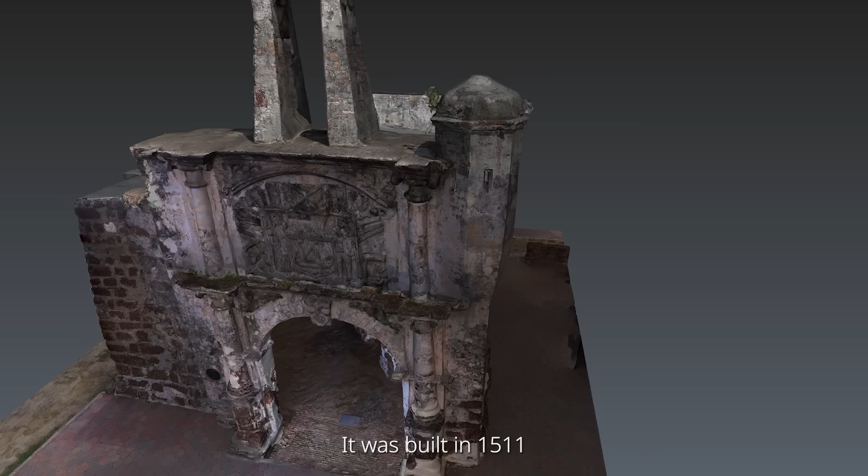A Famosa is one of the oldest surviving European architectural remains in Southeast Asia. A Famosa means 'the famous' in Portuguese. It was built in 1511, shortly after the capture of Malacca by the Portuguese. A Famosa originally had several gates, but the Porta de Santiago was the main entrance on the landward side, facing the town and inland areas, so it is also called the Land Gate. Because of the intervention by Sir Stamford Raffles in 1810, the Porta de Santiago survived complete demolition and still stands proudly today.

Today, we are very glad to be here, sitting in front of this fortification wall, called Famosa, built in the 16th century by the Portuguese when they first came to Malacca. Why are we here? It is quite a question, because as geospatial scientists, what can we contribute to these heritage buildings and antiquities?

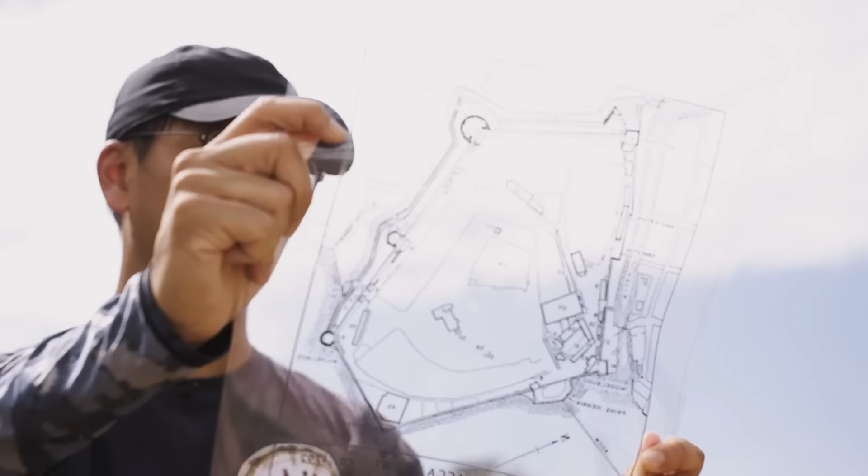Things would start from the maps. Obviously, it is quite a historical record.

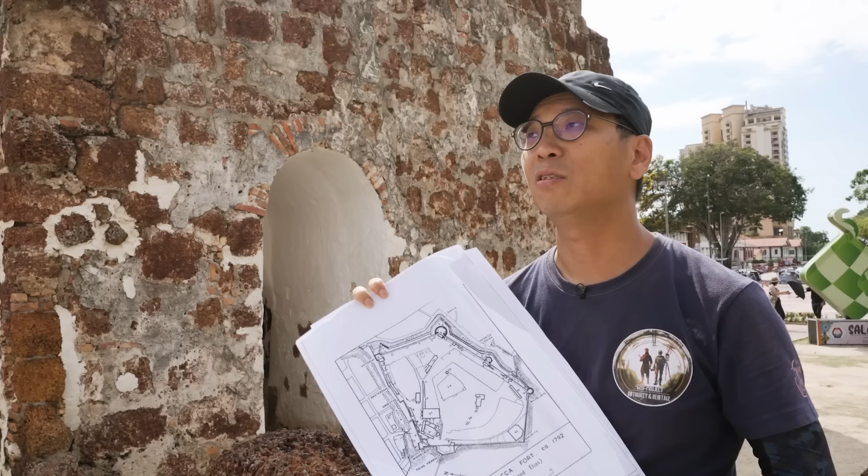Around us there are actually lots of tourists, but probably not many people would care about the real history of these areas — what they mean, what the alignment of the fortification walls is, how they connect to each other, and especially how they relate to the maps. If you think about it, it's like looking backwards to what happened 500, 300, 200 years ago, and now we are looking for very old heritage, or antiquities. The perspective of today's work is, of course, very different from what it was 200, 300, 500 years ago, but this is exactly what we can contribute.

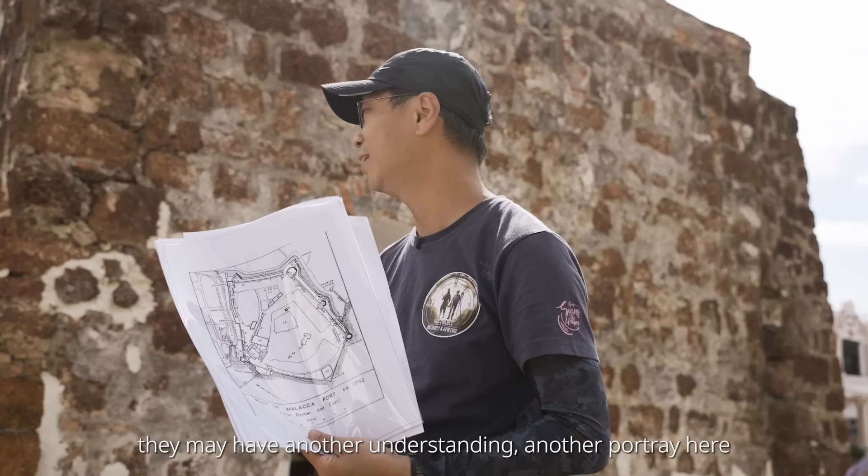If you look forward, after our work here, after our findings, maybe 200 or 300 years later, people with 22nd or 23rd century technologies may have another understanding, another portrait of this place. But today's work is going to be their basis, their foundation for future work, because technologies evolve.

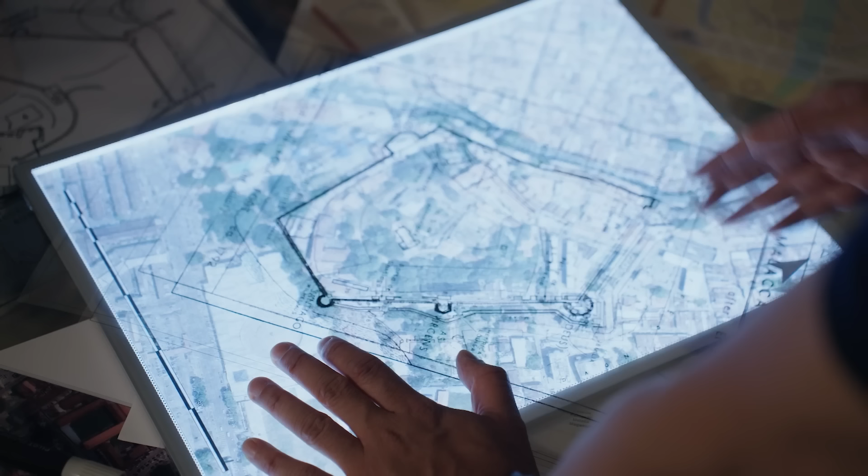Tonight we are here to study the history of Malacca, especially some uncertainties we have identified over the last year or so. In front of me is a map — actually a satellite image of the whole of Malacca — where we have the colonial fortification wall in the middle. So this is the map we have nowadays.

The Malacca city was initially occupied by the Portuguese in 1511. The first map was produced in 1588, outlining the fortification wall around the city for protection against other Western powers or Malay attacks. It's quite a rough map, but you can tell there are a few bastions that give us the outline of how it looked initially. Then we moved to 1660, a map basically produced by the Dutch when they invaded Malacca.

When we put it together at the same scale — at that time a rod scale — there's quite a lot of discrepancies. Before the British came, there's another map from 1792. That map is a lot more detailed, but the discrepancy is even greater. The line of the fortifications from, say, Santiago or the Famosa, basically seems not to align with each other. We tried to stretch the scales into a harmonized scale.

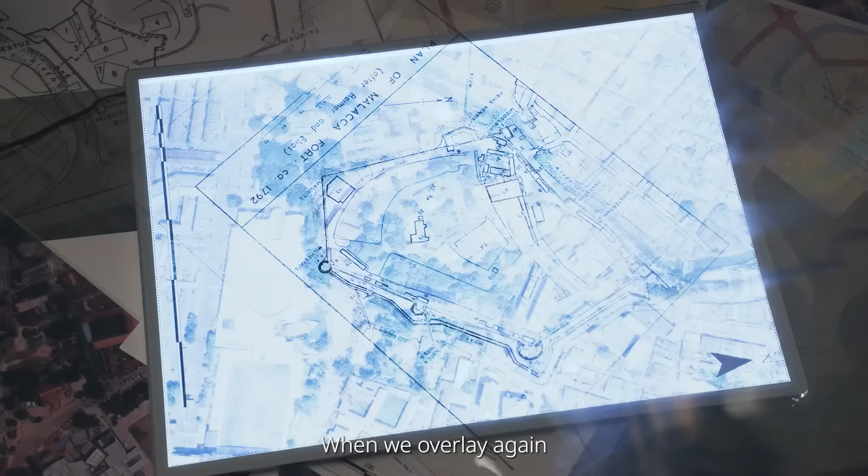When we overlay it again, things start to get interesting, because you can see the corners — the bastions seem to match a little, but bear in mind the scales are not right. The main features seem to be there, like St. Paul's, but the scale has been adjusted.

So why? Maybe a different datum? First of all, what is the meaning of the 'rods'? The English rod and the Dutch rod are very different — it's said to be 16.5 feet, but it varies from 9 to 28 feet. So this scale is questionable because they used rods as a unit. We should take real measurements of some of the landmarks that really existed in the 1660s, to make the scale correct, and then we can compare it.

I think right now you are trying to find out the really old wall, right?

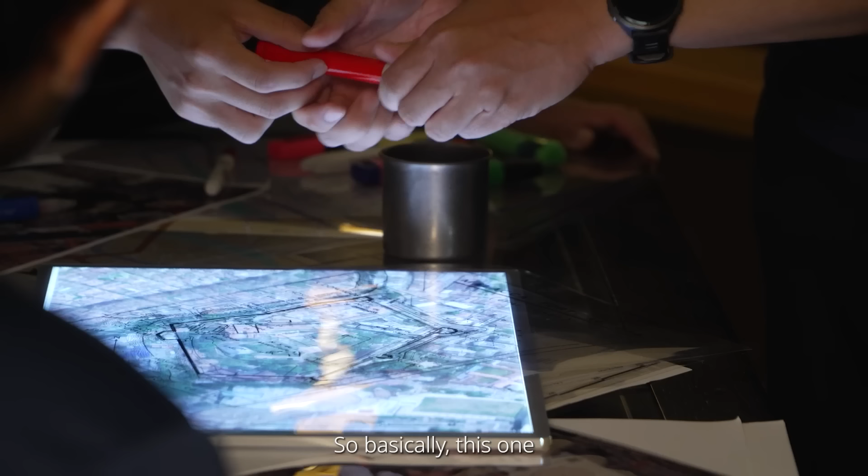So basically, walking along from Santiago to nowadays Famosa, a lot of tourists over there, inside and all the way along this part. And don't forget that the Dutch also built the moat basically outside.

Now what's hidden underground is pretty much unknown here in this part, and they are all very clayey kind of river deposit materials as well.

The details here were well studied. He went back to the old Dutch records, even diaries by soldiers, and also manuscripts and papers, and summarized that the moat is 2 to 4 feet wide and 12 feet deep. That's basically the conditions of the moat.

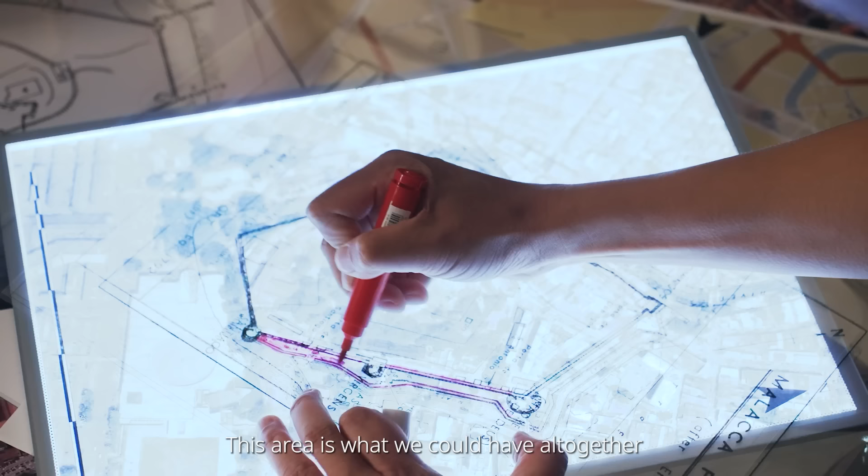This area is what we could have here altogether, so all around here except the river, but then this part as well. So that is what we call the old days' in-depth defense.

At that time the tools were quite primitive, you know. They made use of plane tabling and a compass to define north, so that's why we have some of the differences.

That's why a lot of the fortification footings are still buried because of the development of the city. A part of it is exposed. I think this part should be pretty consistent.

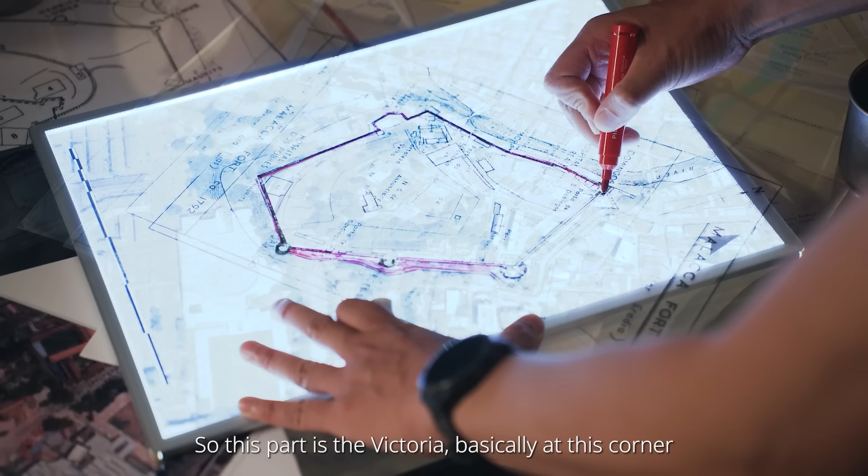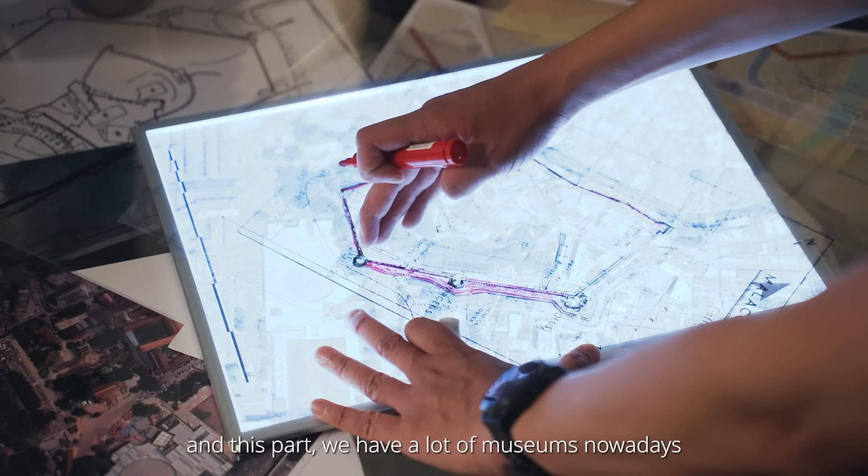This part is the Victoria, basically this corner, the northern part of it. The rest are very touristic, and we have a lot of museums nowadays. The modern history here is everything being reclaimed, so these are all reclaimed lands, including where we are right now.

What we can do is grab the laser scanners and try to scan part of the exposed fortification wall with GNSS RTK to position it accurately, so we can get the correct scale. We have a guide who actually set up the satellite referencing stations here.

Especially those junction points, we should be very clear to define the junction point and the turnaround, so it's easier to confirm the scale of the maps. With the laser scan data, we can have everything corrected and put it back on the map to see which scale is more appropriate, and maybe redefine the meanings of the rocks.

Also, it would be interesting to visit this one. There's the St. Paul here. Yeah, good, they call it Bukit Malacca now.

For the hidden part, after we fix the orientation of the wall, we can adopt one of these as the reference. Then we can use another technology called ground penetrating radar and try to search whether the fortification wall footing is still there or not along one of those alignments.

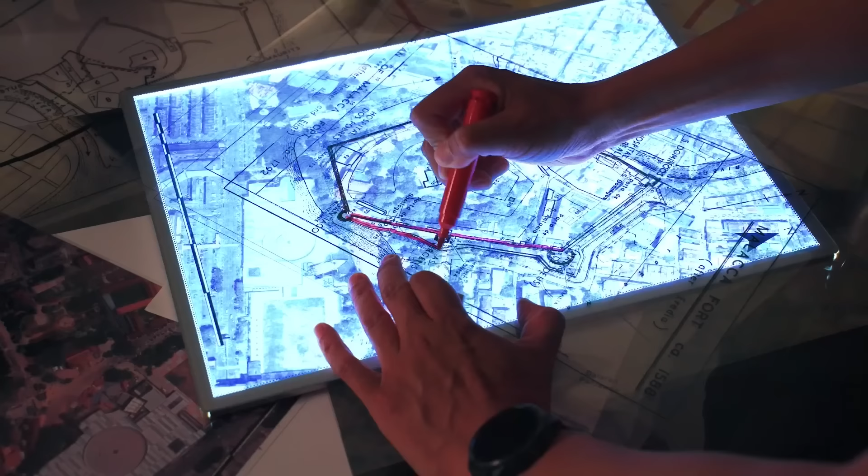Especially from Santiago all the way to Emilia here, this part is quite unknown. And then from Bastion Emilia to Bastion Victoria here, this part too. For those areas where buildings aren't yet there, along the road, we can actually do a GPR survey.

We want to see this so-called geospatial tool bring the history alive. Yes, this is how they bring history to life. We are quite lucky that we can still find some of the parts that we can revisit. Otherwise this would be quite hard.

Some monuments, some features still there, right? Yeah, because you are UNESCO, a UNESCO heritage site, so you have exposed parts. This portion near the river has been sort of exposed recently, maybe about 15 years. The rock near the river here, this part. Oh, this part. Yeah, this part, okay.

We can process together. You stay in the same hotel, right? Yes, yeah.

Nice day, and today we're in Malacca, starting to work on the heritage projects here. We separate ourselves into two teams. Team A will follow me, and we'll do GPR and also GPS for positioning with equipment called ground penetrating radar and the positioning GPS.

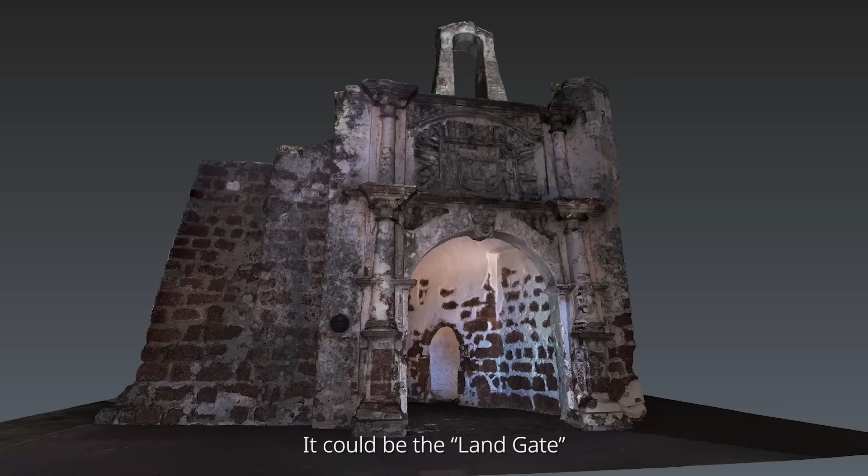The gate behind me could have a few names. It could be the Land Gate. It could be the old days Porta Santiago. Or nowadays people commonly know it as the Famosa, the famous. Different times, different names, different terms, so different people took over, and they of course want to name it differently. You also want to leave their legacy, right?

Exactly, yeah. So from Famosa to the Santiago, we'll do laser scan and GPS. Then from Famosa all the way to Emilia, we try to do GPR. Then from Victoria, where laser scan and GPS is available, and midway between Victoria and the intersection, we still need to use GPR. But where we have exposed parts, we can do laser scans. But normally those exposed features are just part of the wall, so it doesn't mean it's exactly in the middle. People think it's the middle, but it can be at the side, or maybe they're just broken parts. So even an exposed part is not totally certain.

So we are at number 37, the land gates. Yeah, and you can see from the Santiago to the land gates, there's an alignment. And suppose in front of the alignment there's a moat, the river that used to protect the fortifications, and then also a ditch being dug. So there can be a few meters from here to what's in front of us.

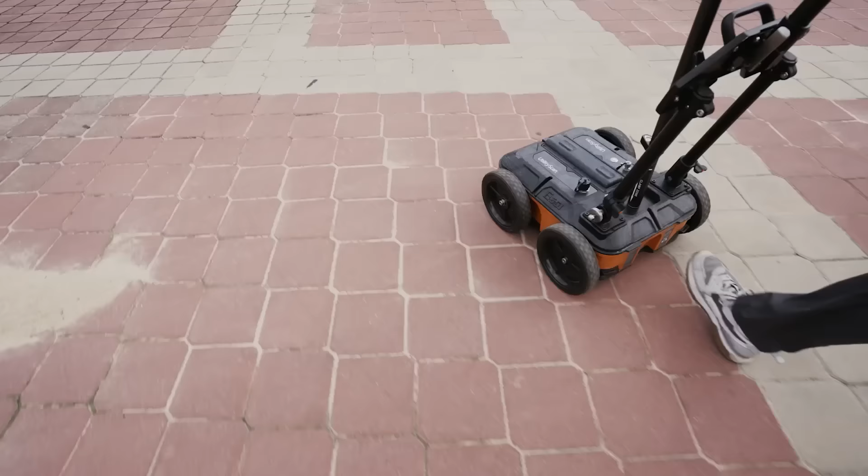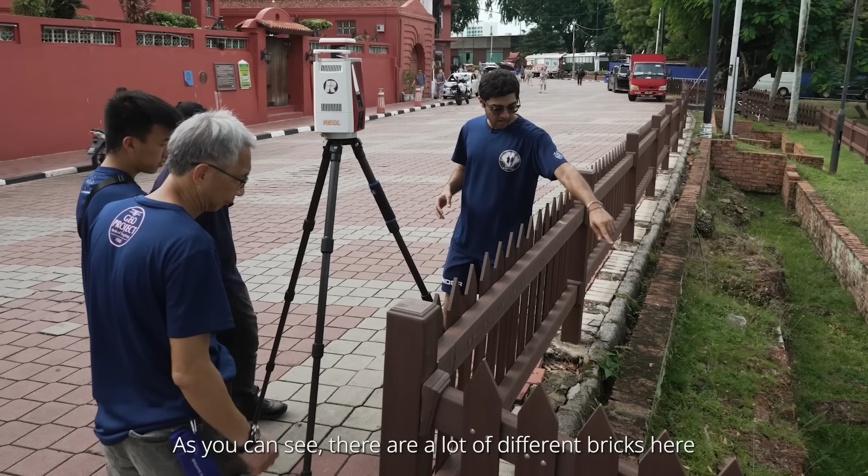So after the first part of scanning, now we are here at the second location. We still want to capture the outer part of the wall. As you can see, there are a lot of different bricks here. The first line of bricks should not be related to the wartime structure, but the second one, the longer one below, looks like it's a bit damaged with rocks. Those are our real targets.

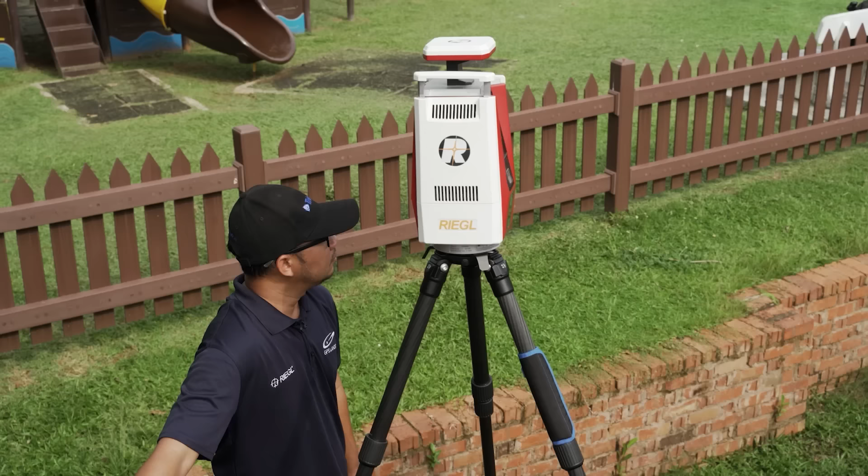So this one is from 1792. Of course, in between there are other maps. Different people drew maps with different cartographic techniques and survey techniques. We don't know whether the survey was done by plane table. Plane table was invented in the 15th, 16th century, so it's approximately the same time here. Otherwise, how could they have a scale, and the north as well? So they had a lot of cartographic and mapping techniques being adopted in those maps, and the technology most likely came from Europe, brought into Southeast Asia.

So this is Emilia, so it's at the back, but mostly not shown. So the line we want to know - do you think the Emilia one is buried down here, all broken down by the bricks?

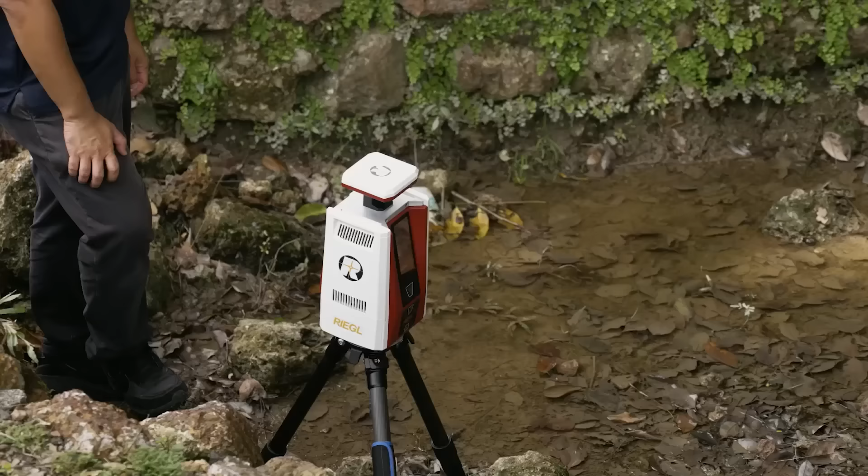We usually circulate around it. As we see now, we go deep down to scan the details of the wall, which cannot be seen if we scan outside the excavation site, especially the condition of the wall, how it looks, and also the orientation of it.

Let's do some settings and then we start our survey. Okay, we already set up the RTK, so now we have 2 centimeter real-time RTK fixed. We already fixed the camera. I think we can start from this angle, go to loop outside first. It seems easier, and it's much better if we have multiple scan positions, then we can filter out the moving object.

So what about the upper part of the Famosa? We try to scan much further away, where we can see on top of the Famosa, or maybe go up of the hill, and then we can scan. We can start here. Yeah, it's much better coverage for the GPS.

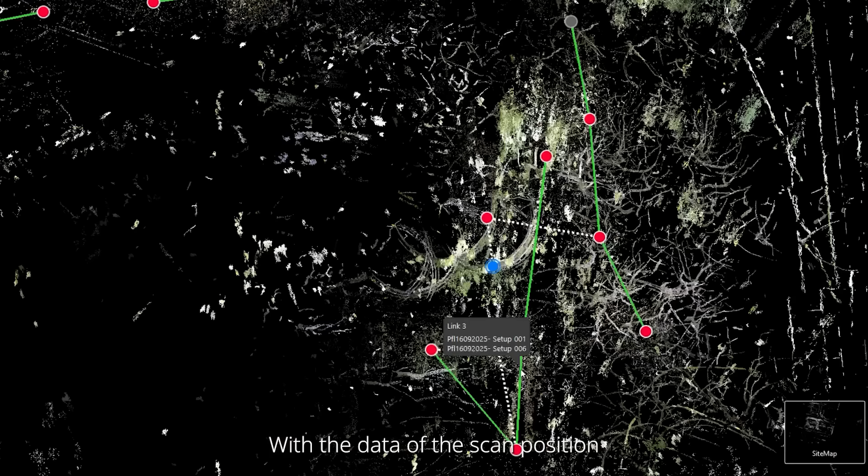So we have to wait for it. One scan position is about 25 seconds, not so much. For the first few scan positions we will use RTK, and then later we will use cloud to cloud to do the registration. The other scan positions will refer back to the first few as a reference, and everything will be RTK corrected, so everything will be very high accuracy. Now we get like 2 centimeter, 3 centimeter RTK fix. Okay, we finish one scan position, now we should move to the second setup.

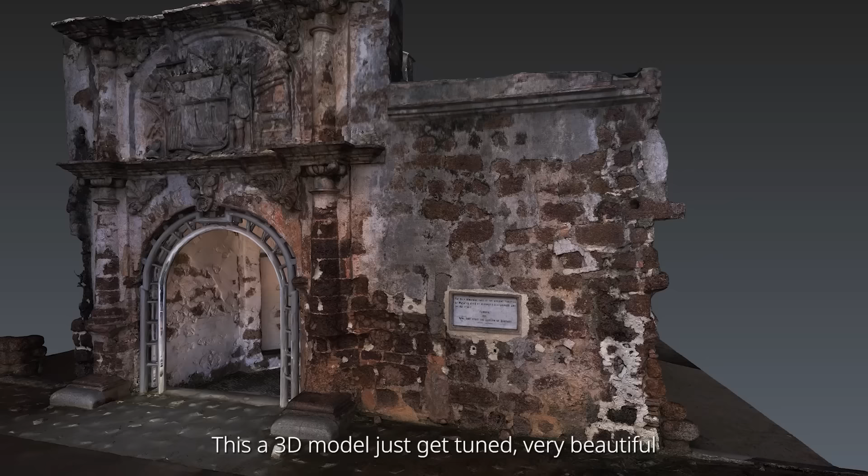Yeah, so take a look. This is a 3D model, just get tuned, very beautiful. The point cloud models and the colorizations, and getting back and forth for the 3D model. Apart from 3D view, let's take a look at the 2D.

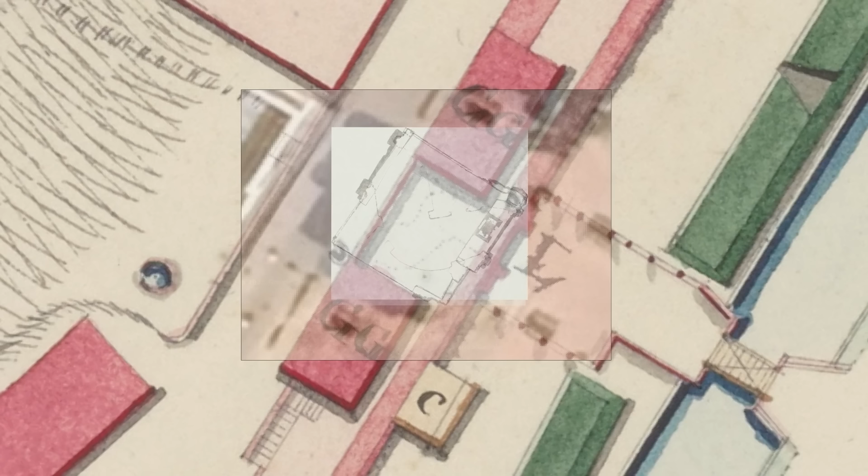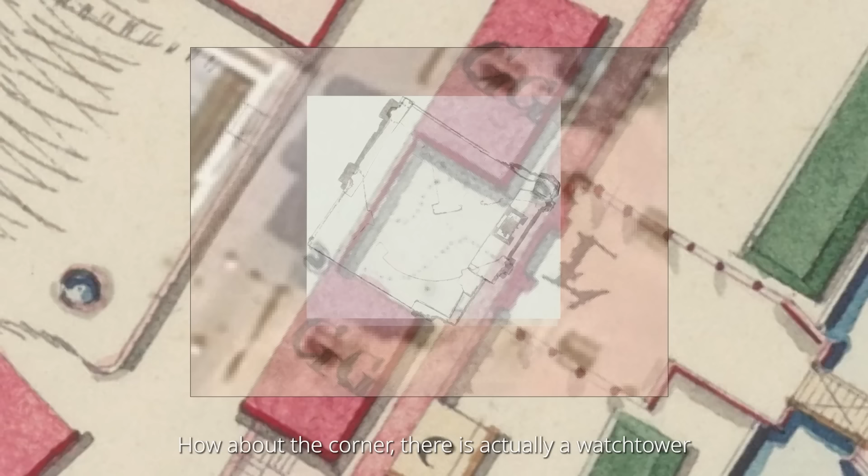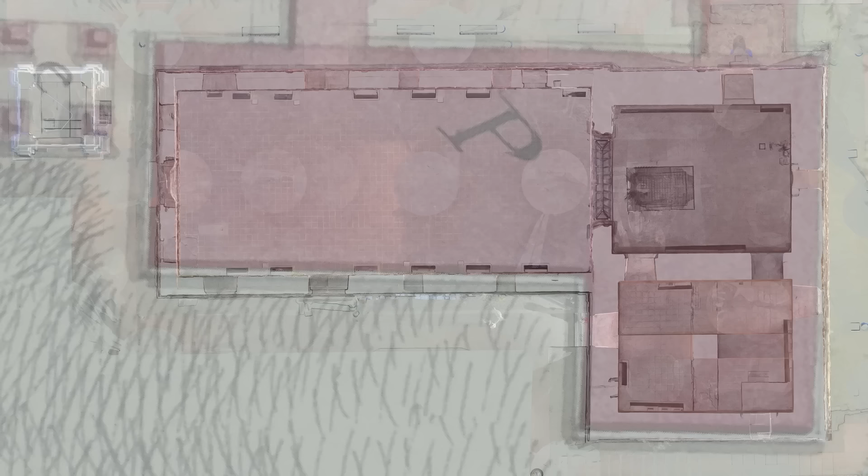Okay, let's go to the hilltop, to the church, St. Paul's Church. The location that interests us most is the inner part, close to the outer. This is a bit of a fly-through from the front entrance to the main hall, where the congregations worship. There's a steel cage there. This morning we heard from the tourist guide it was not there when he was a kid, because people throw money, so they built a cage to encircle the area and protect it.

So let's have a look at how our result would match the maps from 1660. Why don't we start with Victoria? This is the scanning result. Wow, very good, a well-corrected view. The 3D scan clearly shows the square shape of the entire structure, which is beautiful, I would say. The wall footings are actually just underneath here.

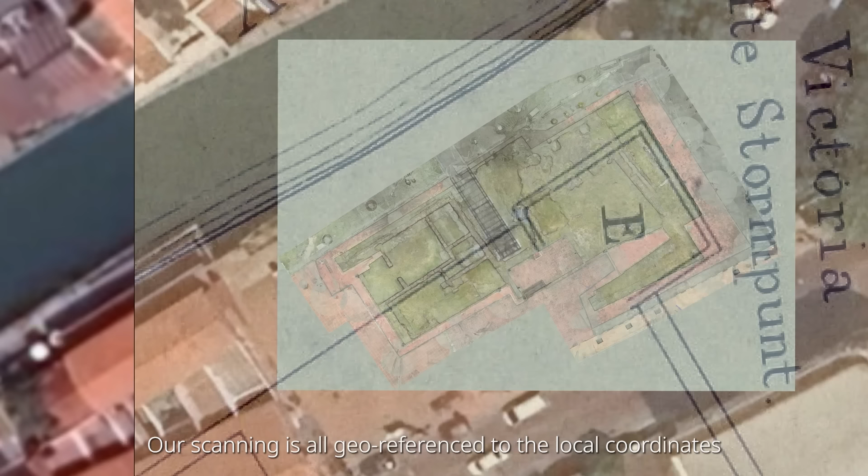Okay, does it match the 1660 maps? Let's have a look. Not quite, right? Not really matching. So our scanning is all geo-referenced to local coordinates and supposed to be the true measurements.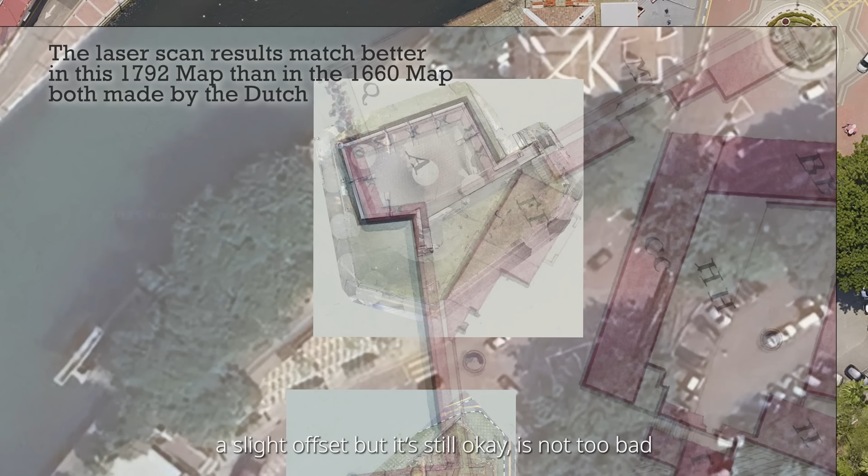Okay, we again go southwest, to Middelburg. The shape alignment again has a slight offset, but it's still okay, not too bad. When we head south, this is the trench just outside the HSBC building. It looks all right. Going further, this one is again a slight offset. But this one is a very close match. This one is one of the trenches, but we don't know the inner wall from the outer wall.

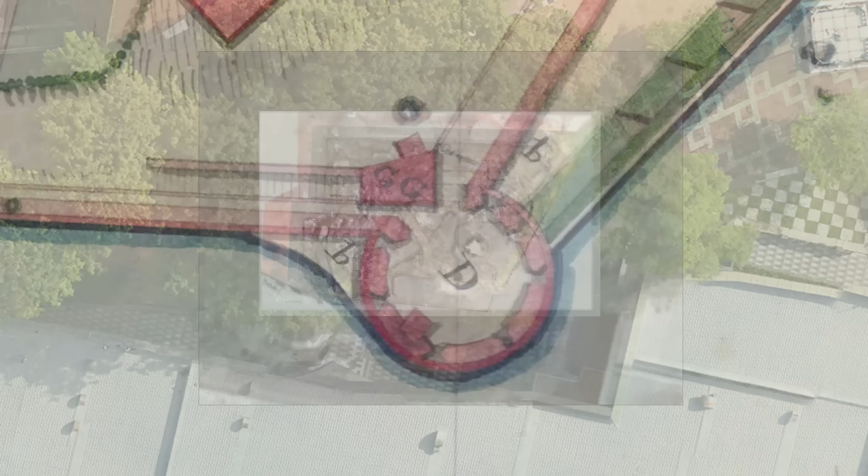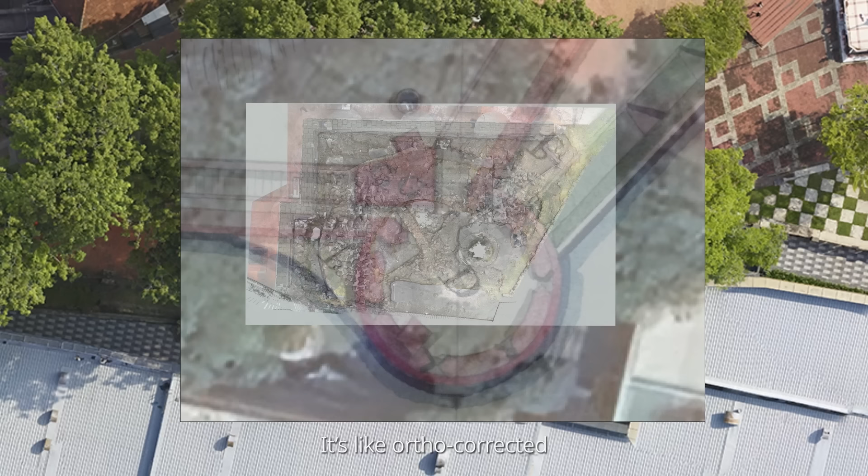Okay, go further, head east. This is the interesting area. Wow, some circular structures. This is what it supposedly looked like, back in 1792. So what happens nowadays? Wow, it's like an oval, a big circle. The function we leave to the historians to interpret.

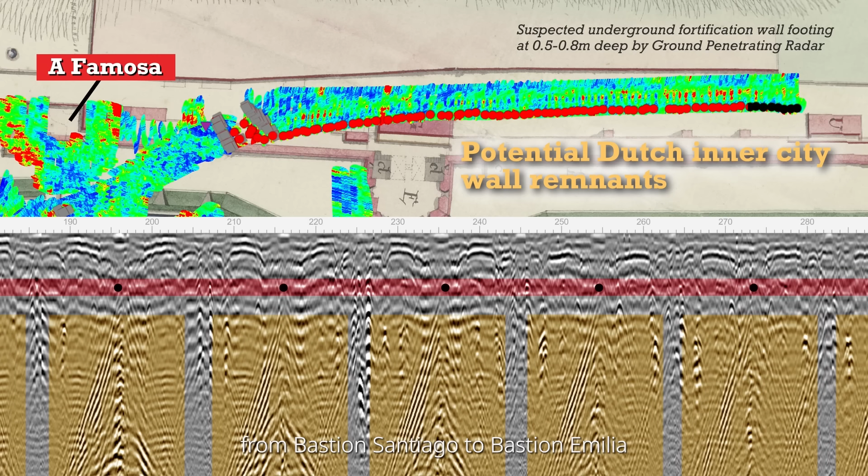Okay, after studying the wall, we have some interesting GPR findings at that area. For this church, alongside this headstone, the tombstone for people used to be buried there, but we don't know whether the body is still there. Four of them are Portuguese, and the rest are basically Dutch.

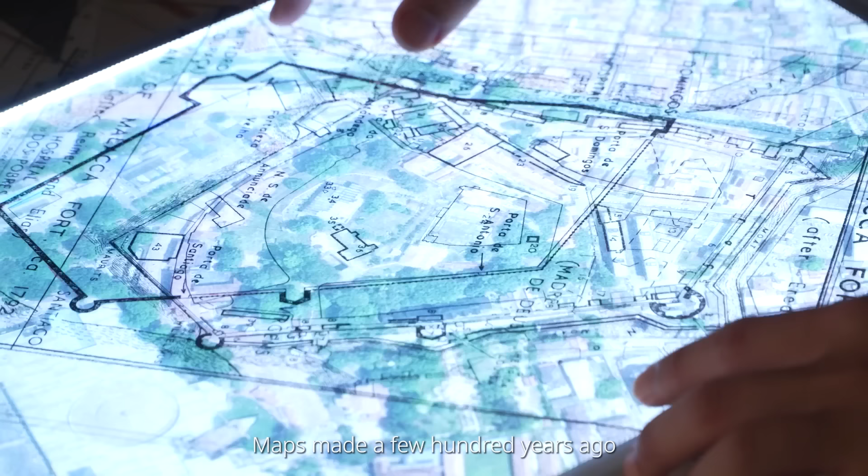So what are our conclusions? Maps made a few hundred years ago are pretty close to reality. Part of the old fortification walls and moats seems buried and still exists today. And in St. Paul's Church, few reflections close to the tombstone indicate the burials may still be there.

Well, I think this is a wonderful experience for our PolyU teams to come here and do the expeditions. Thankful to PolyU's funding for making all this happen, because without the funding from Research Institute for Land and Space, we are not able to come here to carry out these meaningful works. For many years, we have been doing heritage, archaeological or antiquities mappings for Hong Kong, especially Second World War.

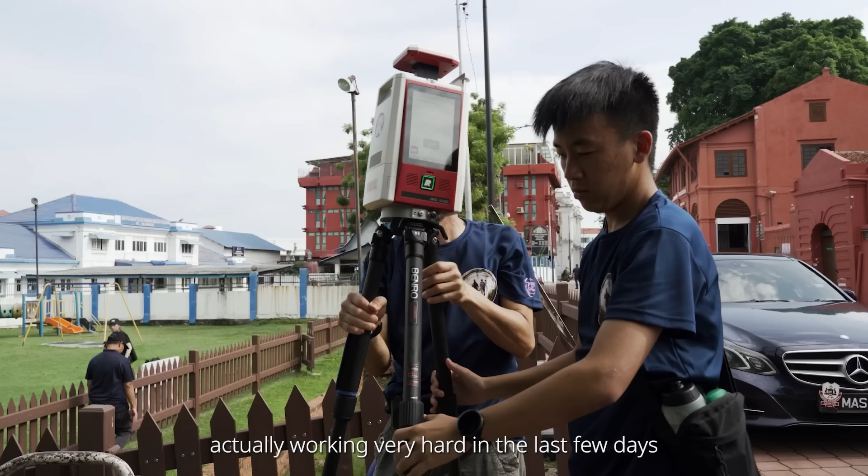This time is really the first time we come out of Hong Kong to Malaysia to work with our fellow Malaysians on the history of Malacca. So I think it is a special experience, and I'm very grateful to my team in my back, working very hard in the last few days, collecting information, processing data, producing images, even reading historical texts. So I think it is an amazing experience for us, and we look forward to bringing these technologies, the spirit and our passion, even to other places that are waiting for these kinds of explorations.